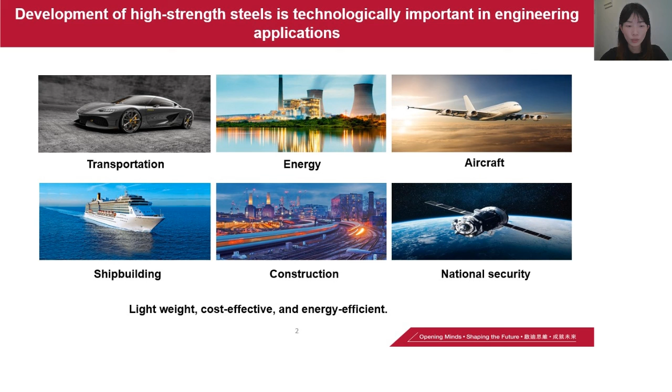High-strength steels play important roles in transportation, energy, aircraft, shipbuilding, construction, and national security industries. Development of high-strength steels is technologically important because they allow for the design of lightweight, cost-effective, and energy-efficient components.

There are four strengthening methods often used to strengthen steels, and they include solid solution strengthening, grain boundary strengthening, strain hardening, and precipitation strengthening. These methods aim at prohibiting dislocation mobility. Precipitation strengthening is recognized as the most effective method to strengthen steels by introducing second-phase precipitates.

Generally speaking, precipitates with a small particle size and high number density have allowed the development of advanced steels with high strength, high ductility, good weldability, and low cost. And this method is very easy to process because the treatment process is very simple.

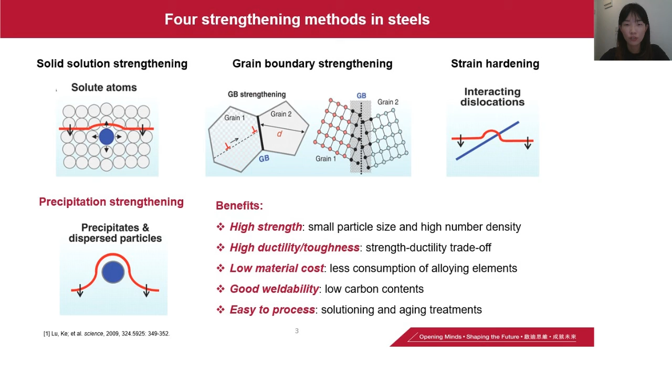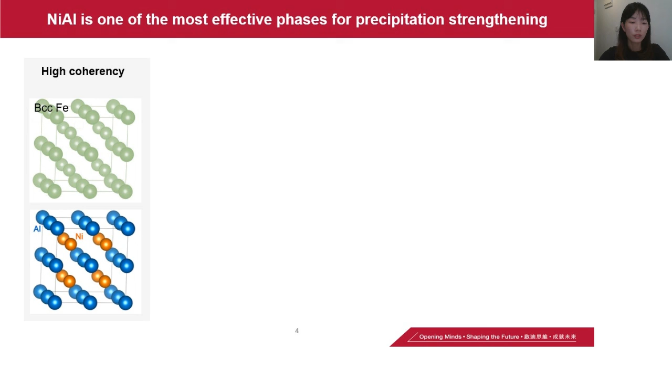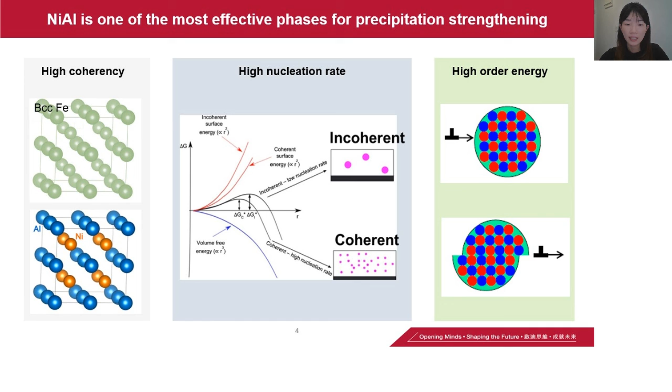Among various potential precipitates used for precipitation strengthening, nickel-aluminum is one of the most effective phases. Nickel-aluminum has a B2 ordered structure with a lattice parameter close to that of BCC iron. The high coherency results in a decreased interfacial energy for nucleation, thus the nucleation rate increases, leading to the formation of high number density nanoparticles. And nickel-aluminum has high ordering energy, which can contribute to the high strengthening effect.

In precipitation strengthened steels, there are two precipitation modes, namely continuous precipitation and discontinuous precipitation. Continuous precipitation refers to the formation of spherical particles in the matrix, and discontinuous precipitation refers to the coarse rod-shaped precipitates formed along the grain boundaries, which grow into the grain interior, resulting in DP colonies.

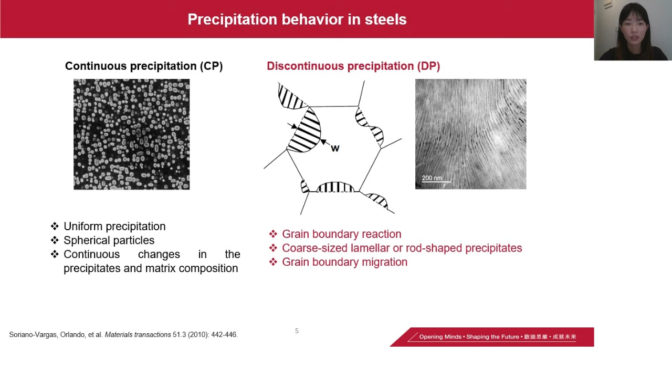Discontinuous precipitation is of great interest because it generally has a deleterious effect on the mechanical properties; it can cause poor ductility, poor stability, and poor overaging resistance. So it is significant to understand how to control the DP reaction in nickel-aluminum strengthened steels. Most studies focus on the CP reaction; research on the DP reaction is very limited.

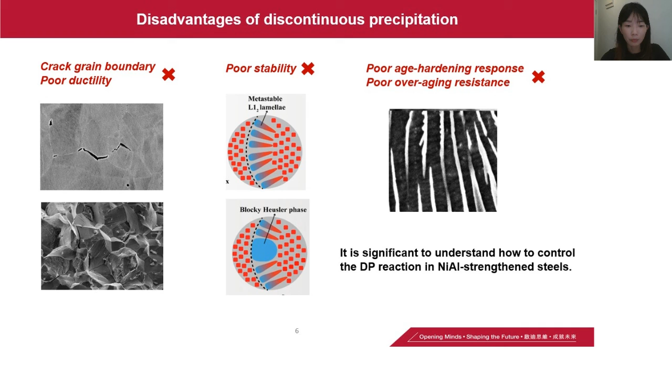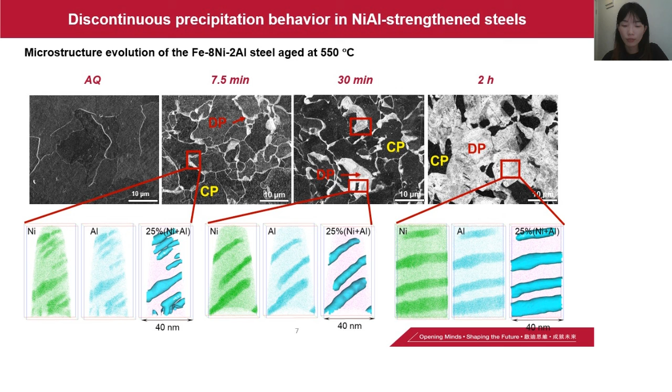From the atom maps and the isosurfaces of the precipitates, we can see that the discontinuous precipitates are rod-shaped and aligned parallel to each other, and the precipitate radius is less than 10 nanometers. We use EBSD to deeply understand the growth of these DP colonies.

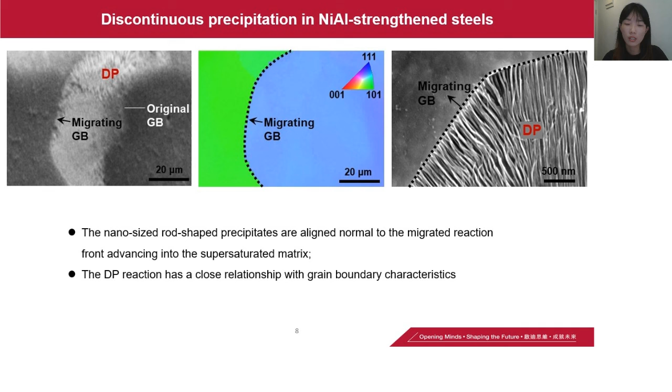As we can see from the left two figures, the grain boundary migrates from right to left. In the right figure, at high magnification, we can see that the nano-sized rod-shaped precipitates are aligned normal to the migrating reaction front, advancing into the supersaturated matrix. This kind of reaction has a close relationship with the grain boundary characteristics.

How to suppress the discontinuous precipitation? We know that in supersaturated alloys, continuous and discontinuous precipitation occur competitively. So maybe we could use the continuous precipitation to suppress the discontinuous precipitation. On the other hand, we can control the grain boundary characteristics to control the occurrence of the DP reaction.

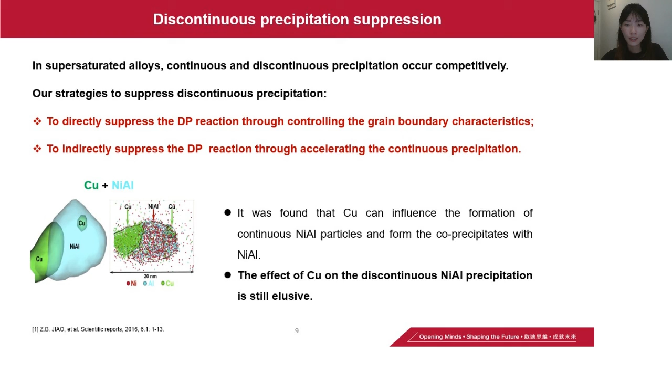In nickel-aluminum steels, it was found that copper can influence the formation of continuous nickel-aluminum particles and form co-precipitates with nickel-aluminum. But the effect of copper on discontinuous nickel-aluminum precipitation is still elusive. So we add copper to our model steel.

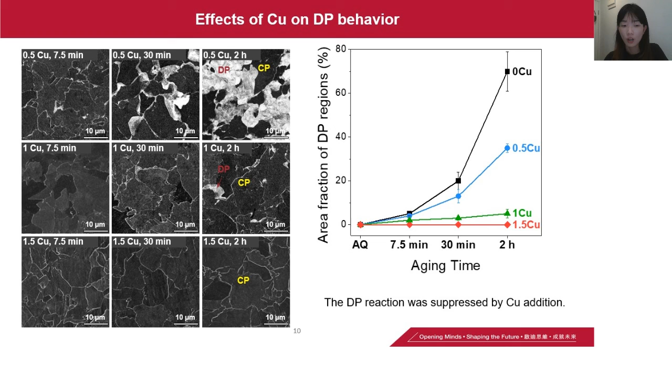From the SEM microstructure, it is observed that the area fraction of DP regions decreases with increasing copper additions; increasing the copper content to 1.5% results in complete suppression of the DP reaction. Because only CP was found in the 1.5 copper steel, we now compare the continuous precipitation in the 0 copper and 1.5 copper steels. Atom probe tomography was performed in the CP regions of the 0 copper and 1.5 copper steels in the three aging conditions.

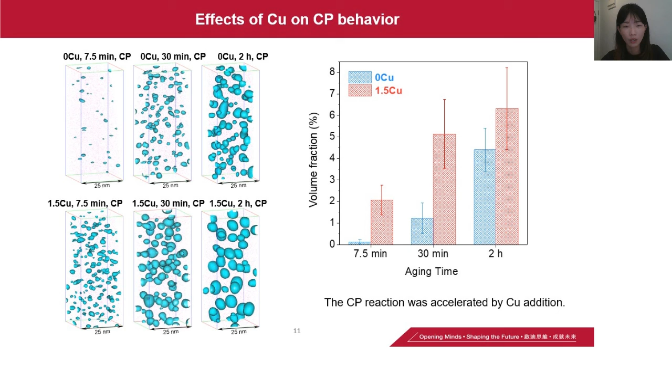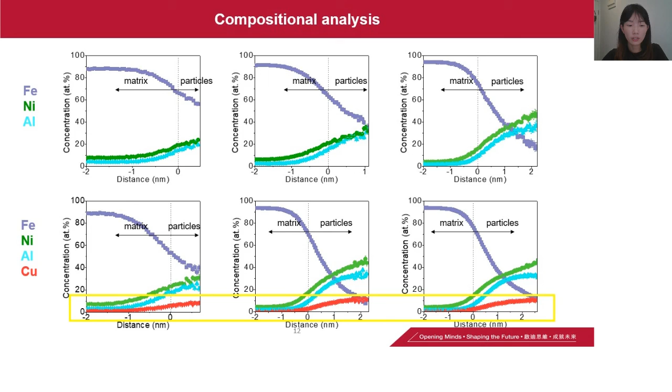To deeply understand the underlying mechanisms of the effects of copper on the nickel-aluminum precipitates, we calculated the proximity histograms. It is clear to see that in the copper-added steel, the copper partitions to the nickel-aluminum particles. From the atom maps of the center of some representative nickel-aluminum particles in all conditions, we can clearly see that the copper atoms, the red atoms, are partitioned into the nickel-aluminum precipitates.

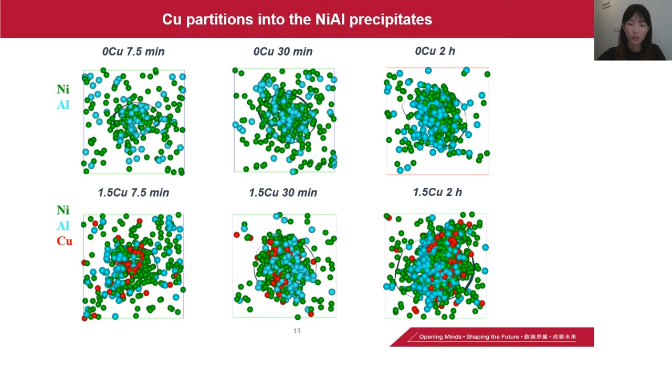So, from the above results, we demonstrate that copper is effective in not only promoting the continuous nickel-aluminum precipitation, but also in suppressing the discontinuous precipitation at grain boundaries. For the mechanisms of copper-induced continuous precipitation acceleration, we did some first principles calculations to see the effects of copper on the CP acceleration.

The results show that the formation energy of nickel-aluminum pairs in the copper-containing supercells is lower than that of nickel-aluminum pairs in copper-free supercells. This suggests that copper enhances the interaction between nickel and aluminum pairs, and thereby increases the chemical driving force for nickel-aluminum precipitation.

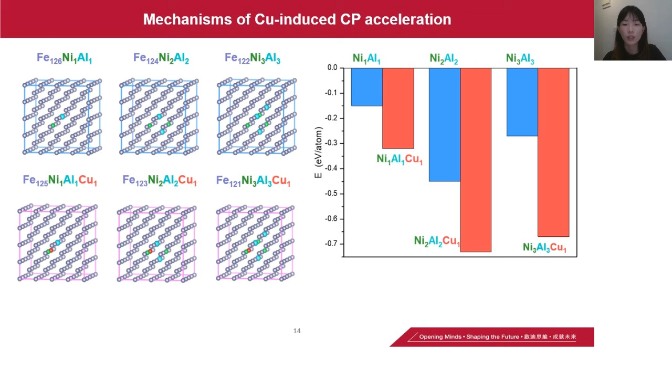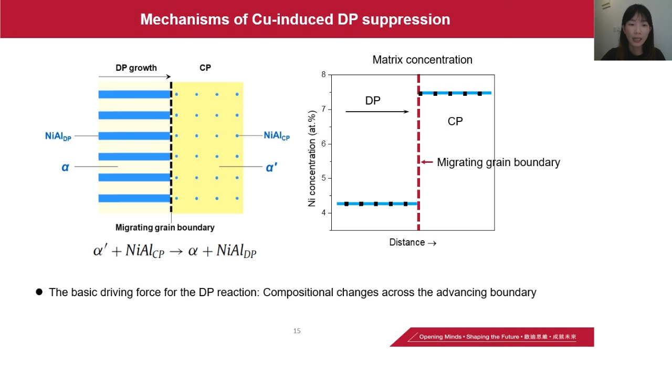We calculated the nickel concentrations in the matrix of the DP and CP regions across the migrating grain boundary. We found that the nickel concentration in the CP regions is apparently higher than that in the DP regions. Thus, we concluded that the concentration difference across the migrating grain boundary provides the chemical driving force for the DP growth.

Based on this theory, we calculated the solute concentrations in the CP and DP regions of the zero copper steel, and that in the CP regions of the 1.5 copper steel. The CP reaction of the 1.5 copper steel consumes the supersaturated matrix more rapidly than that of the zero copper steel, which leads to a considerable decrease in nickel and aluminum supersaturation in the early stages of precipitation. Then we calculated the chemical driving force of the DP reaction via this equation, and found that it is dramatically decreased.

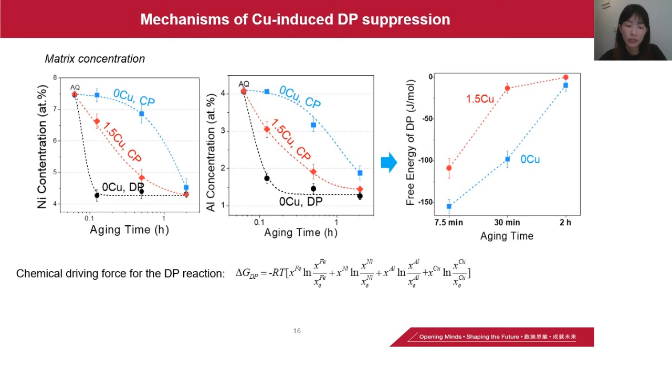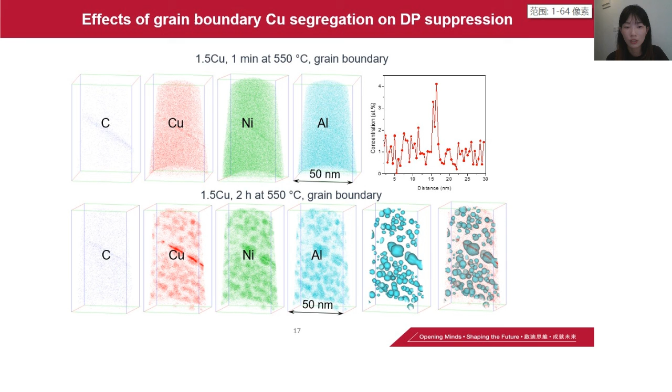So we now analyze the effect of copper segregation at grain boundaries on the DP reaction. At the early aging stages, we can see that copper segregated at grain boundaries after aging for 2 hours. Only spherical nickel-aluminum-copper precipitates instead of the rod-like discontinuous precipitates were formed in the grain boundary region, which further confirms the suppression of the DP reaction.

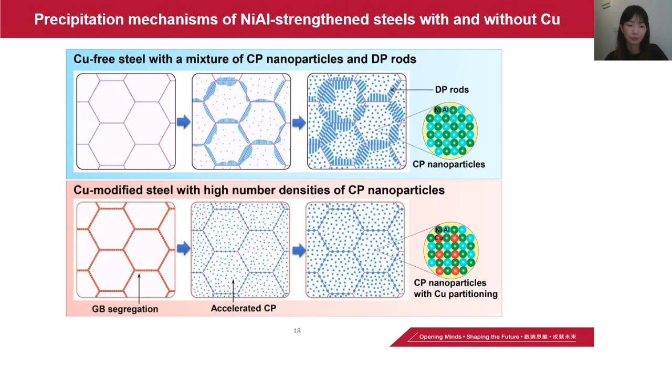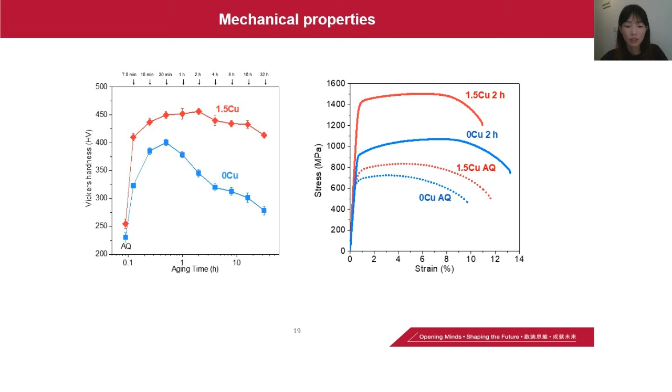So here are our conclusions. The first is that nickel-aluminum precipitation in ferritic steel occurs in two modes, namely continuous precipitation and discontinuous precipitation. The suppression of the discontinuous precipitation can be attributed mainly to the acceleration of CP formation by copper partitioning, and on the other hand, copper segregation at grain boundaries can directly suppress the DP reaction. And we also obtained a high-strength steel with high yield strength and good ductility.